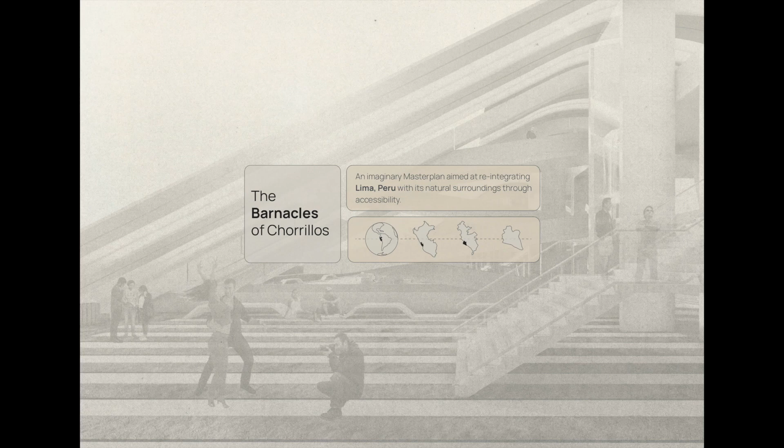This project is titled the Barnacles of Chorrillos, an imaginary master plan aimed at reintegrating Lima, Peru with its natural surroundings through accessibility. The cliffs along the coast of Lima have formed over millions of years due to tectonic activity, erosion from marine and river sources, and adverse weather conditions. This natural process has resulted in the impressive cliff landscape that defines Lima's coastline today.

Over time, there has been a growing interest among citizens in enjoying the natural recreational space of the beach. The district of Chorrillos, situated in the southern part of the cliffs, played a crucial role by investing in the creation of access points to allow people to enjoy this environment. Stairs, bridges, and even a tram were constructed to make it easier for visitors to reach the beach and enhance their comfort.

However, a significant change occurred on December 15, 1970, when Mayor Luis Bedoya inaugurated the Circuito de Playas, a high-speed highway that connected the entire city along the coastline. This construction was made possible by transporting and piling up tons of excavated earth from different parts of the city onto the Lima cliffs, creating an artificial coastline and reclaiming land from the sea. Now citizens had a direct access route facilitated by cars.

Despite 50 years passing since then, the use of private cars remains the preferred method for accessing Lima's beaches. What is surprising is the lack of a public transportation system that serves these areas. Similarly, pedestrian access is limited to stairs and bridges, with no lifts inside. This lack of infrastructure clearly restricts a significant portion of the population that simply longs to enjoy the only sea bordering a capital in South America.

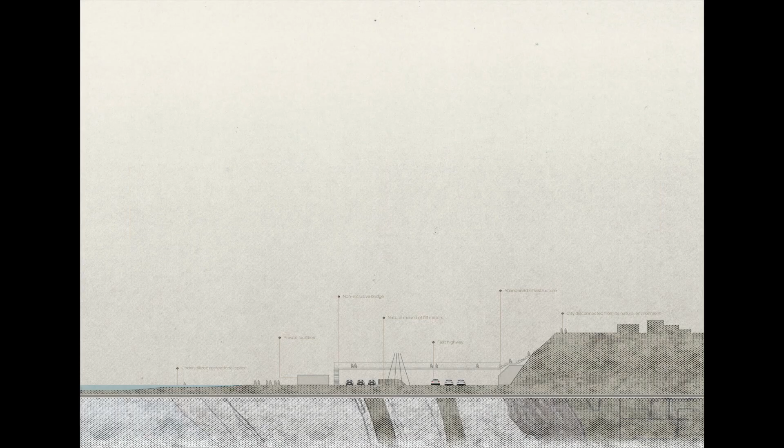The project is located in a rectangular stretch that includes parts of the Pacific Ocean, Agua Dulce Beach, the Beach Circuit Highway, a central median, the cliff, and a former water treatment plant that used to have access from the top. This sector was chosen due to the abandoned infrastructure, since one of the premises was not to harm the cliff. However, it is possible to intervene in the previously affected area.

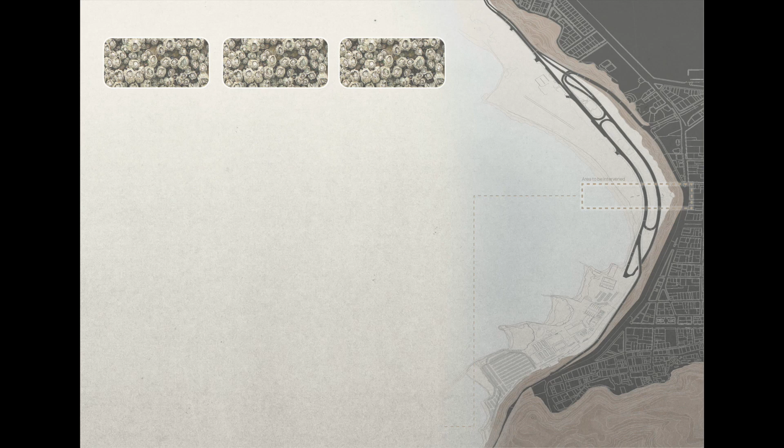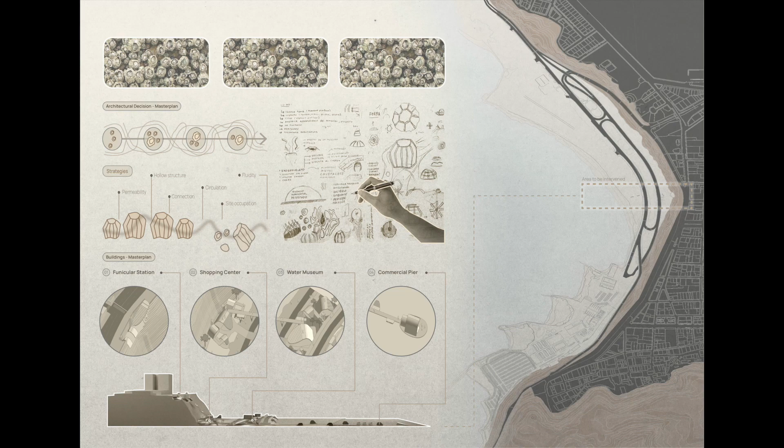The design decision shaped the project by segregating each program into sub-programs in order to generate strategically organized volumes to activate pedestrian flows, keep the park active, and create a public area with visual connections and a human-scale perspective. The master plan required a funicular station, a shopping center, a water museum, and a commercial pier.

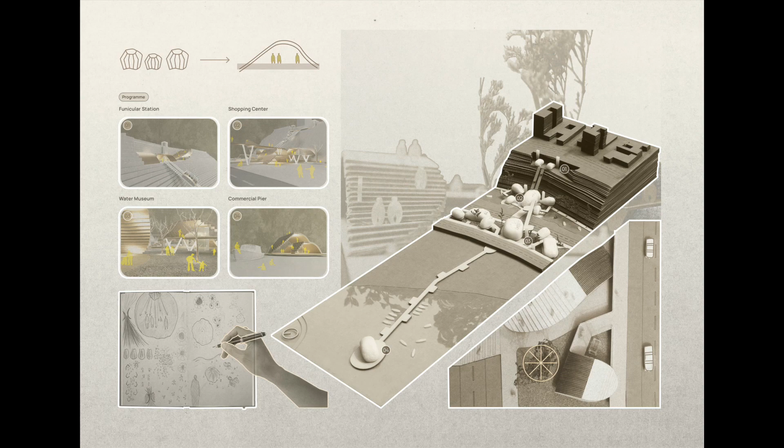The shape of the building, that is, of the barnacle, changed throughout the design process. It was decided to rescue the hollow aspect of the mollusk through a concave structure that aligns with the design decision. By segregating the sub-programs through small concave buildings, it was possible to avoid having a single, solid building that would close during the night.

Through this design decision, a mini-city is created where each program is independent, generating more dynamic intermediate spaces for users to interact with each other.

Not only was accessibility addressed through the funicular and the linear connection between all the programs, but a tram was also included in the master plan, taking into account the existing 3-lane highway of the Playas circuit in the Costa Verde. One lane was chosen for the exclusive use of an electric tram that would benefit all Limeños. The final station would be located within the Water Museum program.

It should be noted that within the area to be intervened in the master plan, there was nearly a 3-meter high earthen mound characteristic of the site's topography, which was adjacent to the Water Museum. This could be both a challenge, as it hindered clear views of the sea from one side of the project, but also a design opportunity, as it could be creatively incorporated into the detailing of the museum.

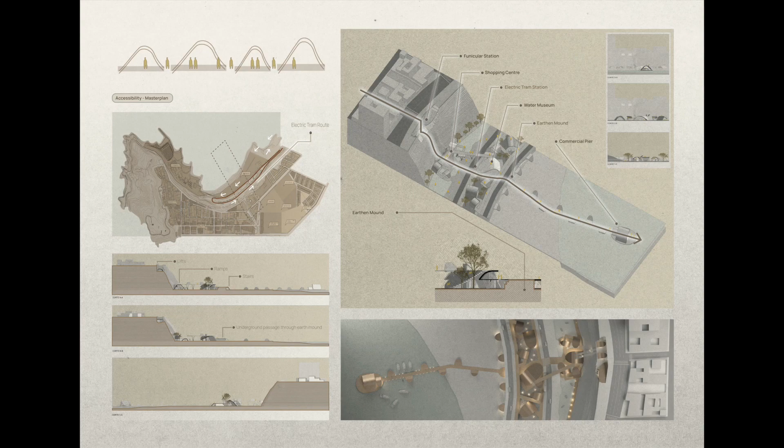The Water Museum aimed to be the only program within the master plan that would include a station for the future electric tram. Additionally, this space would serve as a transition between the cliff and the Agua Dulce beach. The site would be used for showcasing both temporary and permanent exhibits about the ancient basins of the Lima Valley and the history of the Chorrillos district.

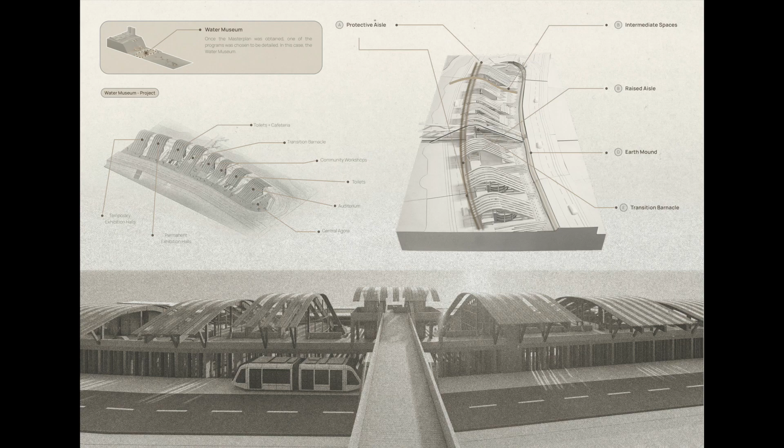On the other hand, it would feature service classrooms for the community and a grand theater for the benefit of the citizens. Each of these sub-programs will be carried out through a barnacle structure. A few of the programs in the project were temporary exhibition halls, permanent exhibition halls, a transition barnacle, a multicultural auditorium, a second-level aisle, and a tram station.

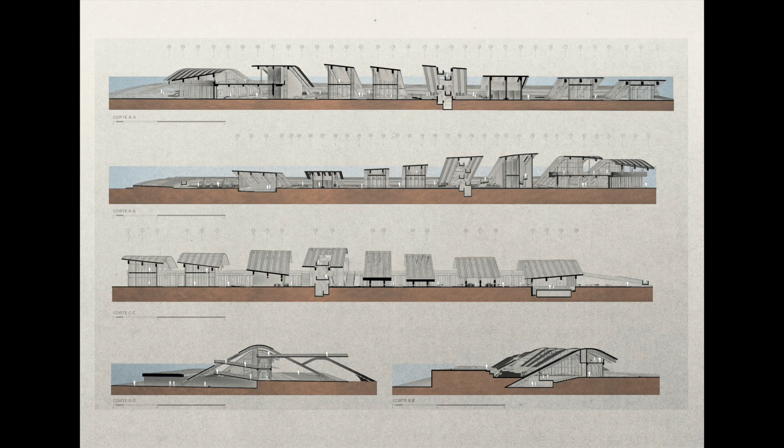Each barnacle had a different altitude in order to make it easier to blend with the environment. Each barnacle had a different structural element such as enclosures, ribs, concrete anchorage, covering, concrete arch, concrete beams, and wooden supports.

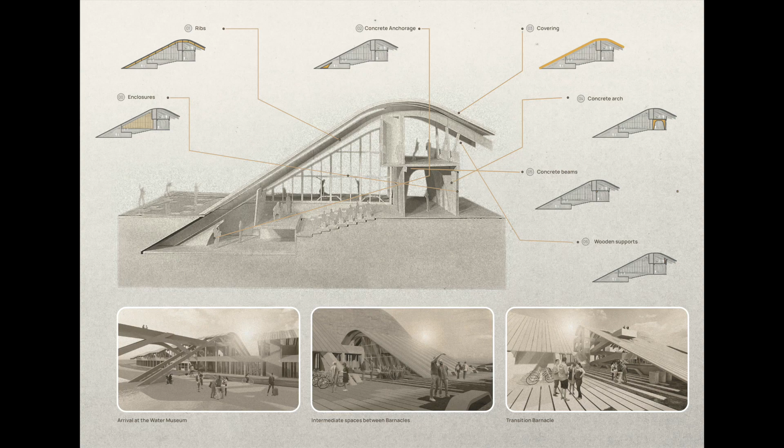Finally, through this project, we will have the opportunity to connect the citizens of Lima with their environment, creating a project that takes accessibility into account.